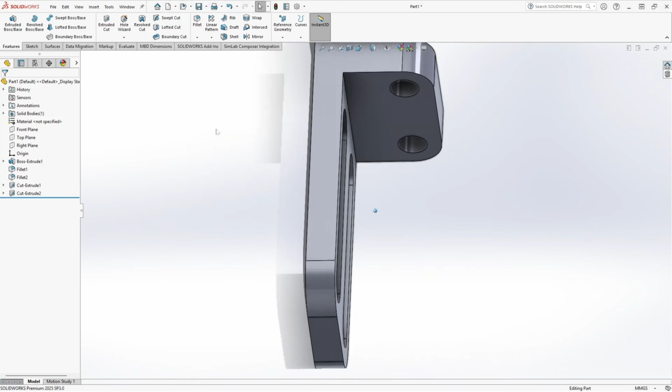Let's create one more tutorial in SolidWorks. In this video, you'll learn to use the Extrude, Fillet, and Extruded Cut. So open SolidWorks and let's go.

The first step to create this part, we will make this face here. So to create this sketch, we have the dimensions here.

The distance between this line here and this one is 60 millimeters. The distance between this line here and this one is 150 millimeters, and here is 20 millimeters, the distance here, and the distance between these two lines here is 15 millimeters.

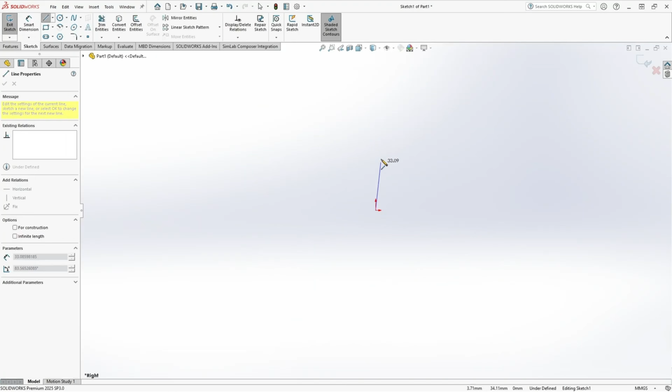So let's create this. Go to sketch and select the right plane and select the line, click here in the midpoint, make this sketch here.

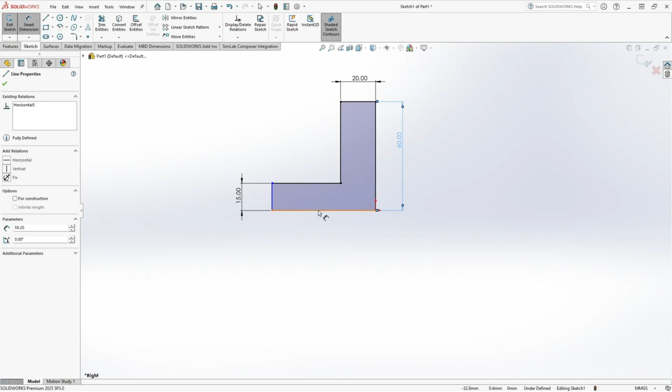Okay, go to Smart Dimension. The distance here, 15, 20 millimeters here, 60 millimeters here, and 150 millimeters here. We made this sketch, okay?

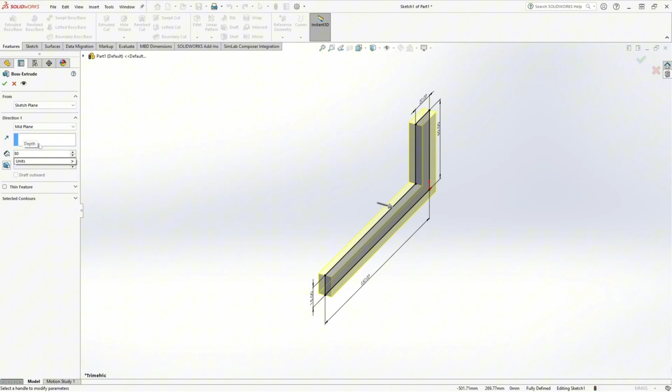So go to Features and select Extruded Boss Base. And we need to extrude this 80 millimeters. So the direction here, select mid-plane and the distance 80 millimeters. And press OK. We made this one.

And now let's create the fillets. We have a fillet here with 20 millimeters of radius. And the fillet here with 15 millimeters of radius, okay?

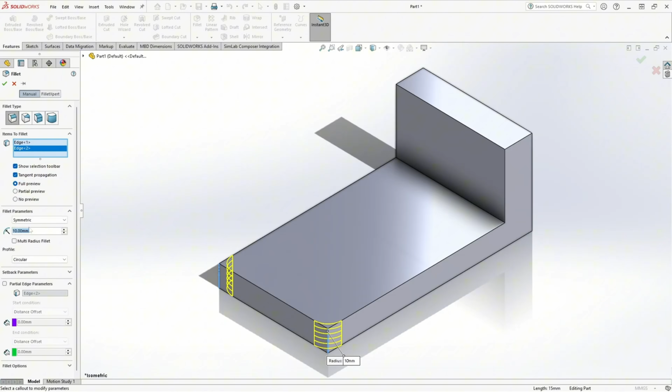So go to fillet, the fillet type, select the constant and select this edge and this edge here. The radius here is 20 millimeters, press OK.

And go to fillet again, select this edge here and this edge. The radius here is 15 millimeters and press OK. We made this one.

And now we will create these two holes here. This hole is concentric with this arc and the diameter is 15 millimeters.

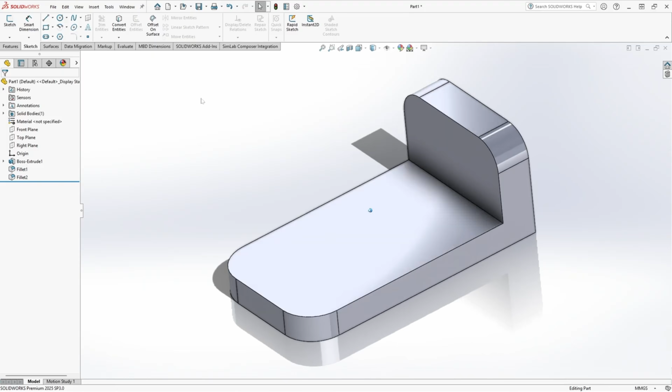So to create this, we use the Extruded Cut. Go to Sketch and select this face, select the circle, put the mouse here in this edge to find the center, make a circle here. Make the same in the other side.

And now select the circle, hold Ctrl in the keyboard, select this circle, and add relation. The relation here will be equal. Go to Smart Dimension. The diameter here is 15 millimeters.

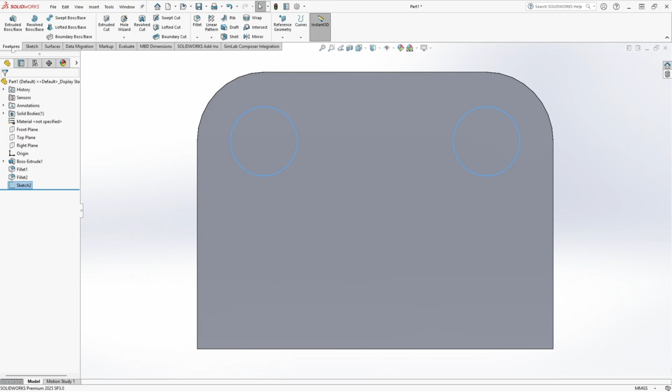And finish the sketch and go to Features and select Extruded Cut. The direction here, select through all and press OK. We made this cut here.

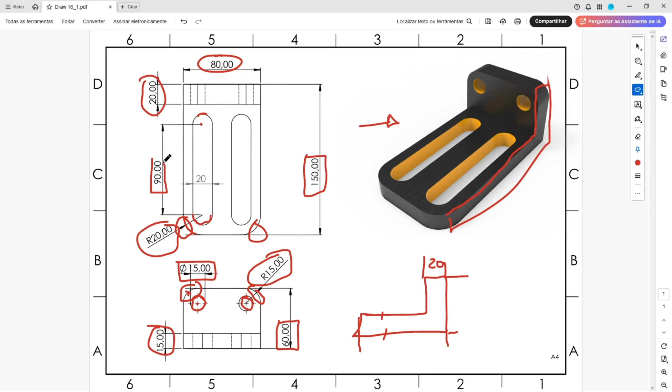And now we need to create this slot. This arc of the slot is concentric with this fillet, okay? And this slot has 90 millimeters by 20. So let's create this.

Go to Sketch and select this face and select straight slot. Find the center of this arc, click here, make a slot here, make the same here in this side, find the center and create another slot here, okay?

And go to Smart Dimension. The distance between these two lines, 20 millimeters, and this line here has 90 millimeters of length.

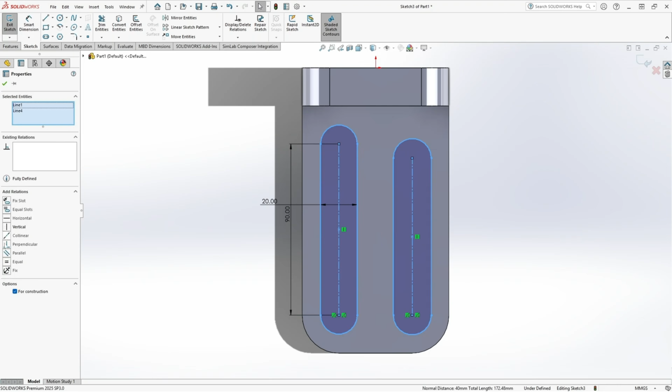And now select this line, hold Ctrl in the keyboard, select this one, add relation equal, press OK. And select this arc, hold Ctrl in the keyboard, select this one, and add relation equal, and press OK.

And now go to Features and select Extruded Cut. And the cut here can be through all this body. It is through all here, and press OK.